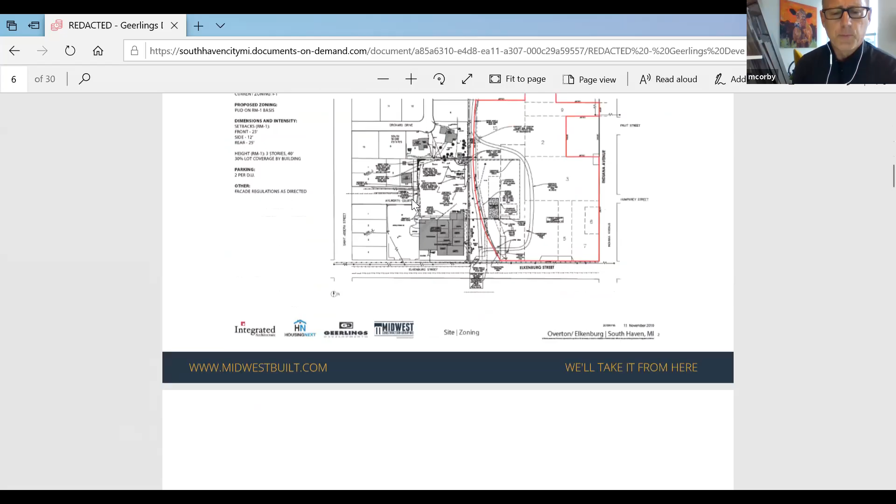And I think Ryan made a good point. Even since we made the submission in response to the RFQ, we've already talked about some alternative directions. So I think Ryan's point is well taken. What you're seeing is a good reference point, and it certainly helps explain a lot of the things we want to accomplish here, but we've also talked about some other things that I'll mention in a bit.

Right now, this current site plan includes 137 units with a focus on walkability. You can see a lot of emphasis on edges and how we use architecture to frame the edges, but also to contextually relate to things already in place, like the trail to the west of the property, and making sure we establish good edges both on Elkenburg and Indiana. Because the property is large enough, we wanted to make sure the internal circulation felt like it was part of the neighborhood, versus just arriving into a parking lot.

We want the entranceway to be tree-lined, walkable pathways, with front doors on those lanes. So I think it's very important that part of the current fabric of that area of the city be expanded.

We have a kind of community within a community, or a neighborhood for what it's worth. We've got a community center, but the idea was to create something unique here with the trail on the west edge.

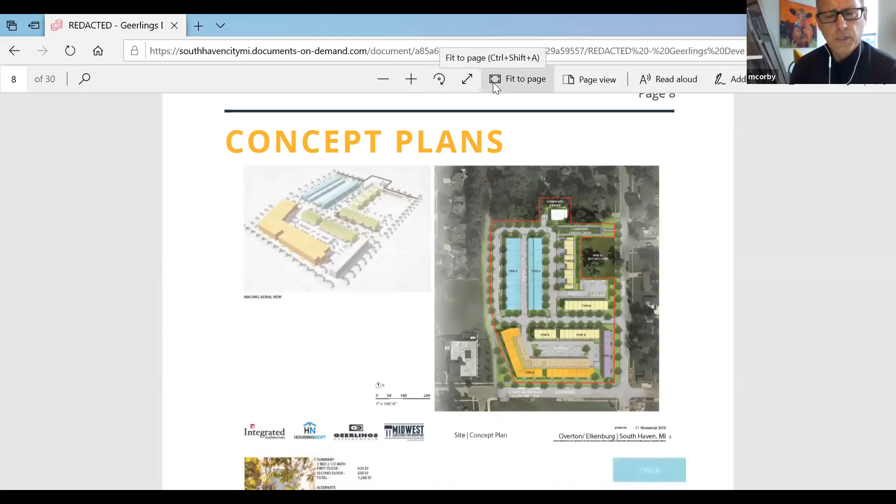We do have some community gardens that we're planning. The wonderful thing about this particular site is it's got a lot of amenities within the area, both recreational and so forth, but these pathways, like the trail and everything, are great. We were looking at bringing some community gardens in there to give another amenity and component to this particular area.

The community center would be a social hub of this neighborhood. We're also talking about introducing some units there too, so maybe a two-story building with some apartments above the community center itself. So it's really focused—our focus has been on walkability, diversity of unit types, and affordability in terms of having different scales of housing options for individuals and families to look at.

It's really something we're excited about. We feel it knits into the neighborhood very well. I guess I'll stop at that and let Scott continue with maybe some of his points.

Sure, if you have any questions, I don't know if we're holding questions to the end or not, but I'll be happy to take any now, or I'll let Scott continue. I don't know what the format is exactly either. So Kate, feel free to interrupt if anyone would like to make a comment, and we're certainly willing to talk at the end or during this time, whatever works best for you all.

Just to add a little bit to what Mike said, I know diversity of housing types is kind of a goal of the city. We're trying to be real sensitive to that. I also know home ownership is important, as we've done a couple projects in the Holland area with the same goals in mind.

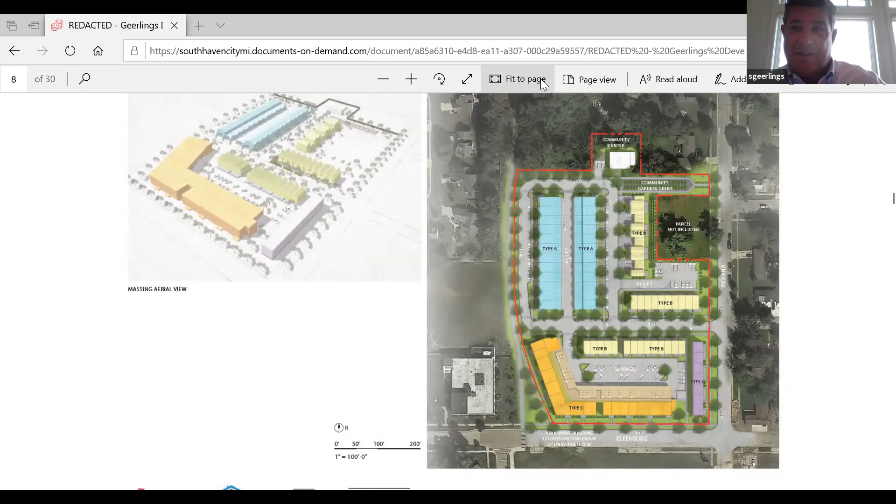I think at this point, I'll stop the share and see if anyone has their hand up, or if any of the Overton committee have any questions for Mike Corby. It looks like Mike Neese does. Let me see if I can get Mike to unmute. I think you did. Can you hear me? Yes, go ahead.

I was looking for just a little bit more information. I really appreciated the data you gave us on the price points, I thought that was well stated and really helped. But I wonder if you have any kind of a target on what that mix might be, a percentage or whatever of market price back to what we might call affordable. Have you thought through that yet in terms of what that target would have to look like to make this project possible for you?

You know, I would say, and Mike Corby, feel free to interject, I would say probably in the neighborhood of 50 to 60% affordable, and the balance market rate and/or for sale units. I think that's kind of where we're looking. Mike, what would your thoughts be on that? It might be actually just a little bit early to tell until we get the final definition of what we're actually building in place. But I think that's our thought. I think there's a need for both. And you know what, I think we'd like to work with you and that market study to kind of come up with what we all think is the sweet spot.

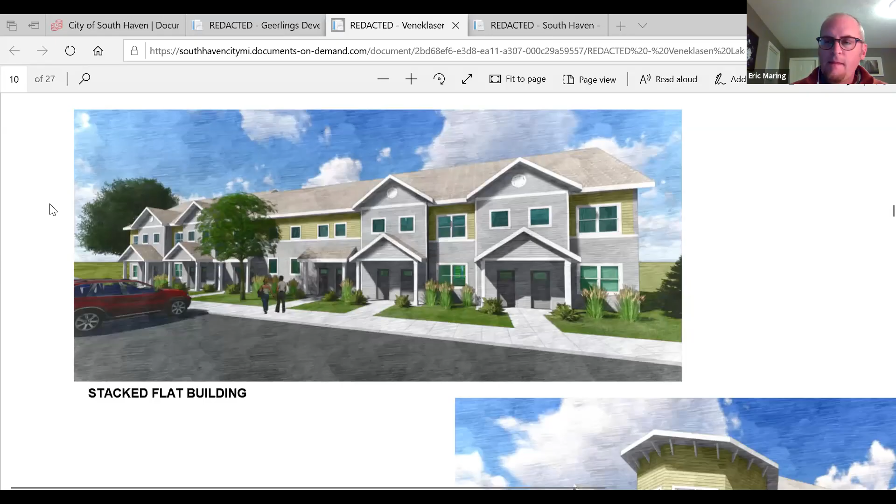Thanks, Phil. I don't know if you can bring up our drawings that we have. I think our site plan is on page 11. Let me see if I can fit it better. Zoom out a little bit. That's not going to work. All right, how's that? That should work.

Thank you. I'll just run through our initial thoughts. This is the result of our team's analysis and thoughts for the site. We're currently proposing 110 units on the site. We currently have a combination of apartments and stacked flats at this point. That's of course flexible as we move forward.

We have a 3-story building, similar to the last proposal, down at the southwest corner. Our thought being that of the whole site, that's probably the corner that feels like the most dense product would work. It could provide a little bit of a gateway feel between the Van Buren trail that runs through there.

We also have some 2-story stacked flat product around the rest of the site, really wanting to fit in better with the neighborhood here. That's why we went with the lower 2-story, smaller building. Most of these are, I think, around 8 or 12 units, so a little bit smaller scale.

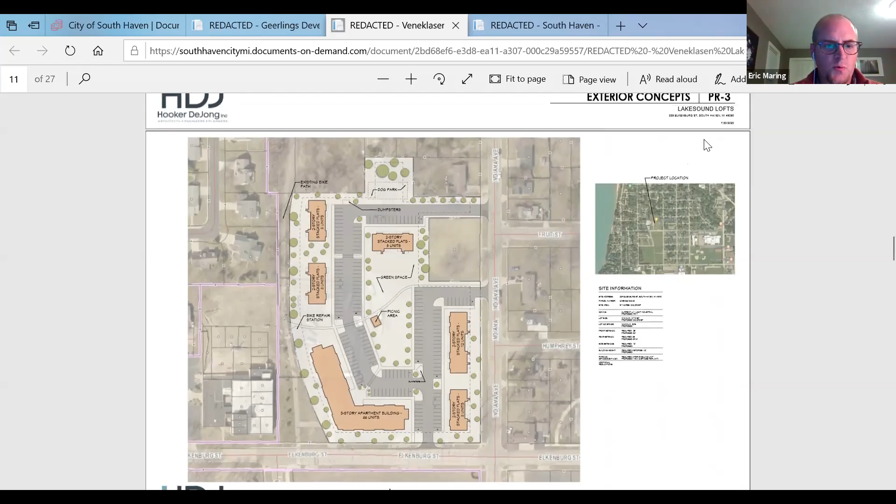Again, just to provide a better transition into the single family neighborhood to the northwest, the north, and the east there. The goal of the project was really trying to fit within the community with these 2-story buildings, and providing a stacked flat, which does provide good visibility both from the front of the unit and the back. So inside these units you have windows where we have parking, and windows again on the backyard, trying to provide some visibility into these landscape buffers or setbacks, as well as some visibility off of Indiana Avenue.

Along with the setbacks, we've started to include some central green space in here. You can see, with a path that runs through east-west, that provides a community connection through the site, to the Van Buren Trail, to the neighborhood to the east. We have a little central park planned here. We purposely don't have a playground, or we'll plan a smaller playground, building on what Chris said earlier about trying to utilize Elkenburg Park to the east, and helping to transform that area, knowing families in this development are going to use that park pretty heavily, so we can help further enhance that area as well.

We're proposing some project amenities in this 3-story apartment building that we have, figuring that's where we would locate some community spaces or lounge, fitness center, dog spot, bike storage, knowing we're along this nice path. These would be located on the ground floor of this apartment building, able to be accessed by all the residents of the property.

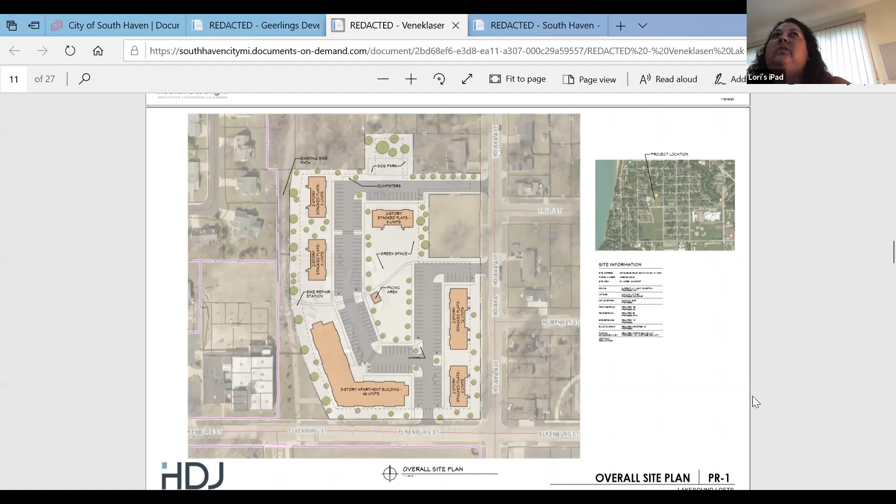We are rent regulated and governed overall by Section 42 of the Internal Revenue Code. That affordability has to be maintained for a minimum of 30 years, controlled via a recorded regulatory agreement. It also controls not just how much we can charge people, but how much we can renew them at, so we can't move them in at a low rate and then do a bait and switch a year down the road with a huge rent increase. We're restricted there as well. So the value of using these regulated lending sources is that it puts longer term restrictions in place and helps take care of that side of it.

So to us, one of the key points we took away from the city's RFQ was to ensure affordability as well as availability to workforce folks in the middle income range. Our feeling is that the best way to ensure that is to focus more on a rental project for the first project. Those regulatory restrictions from the finance sources are going to help ensure that affordability for the local workforce is maintained.

So as soon as product becomes available for home ownership, we don't have control anymore of who's moving into those homes. So I think it would put the issue of your concerns with vacation home purchases right back on the table. Our thought is to make this more of a two-phase project process, so that phase 1 is more of the rental rate units.

Phase 2 could become more of home ownership based units, so that the rental units become a stepping stone to home ownership. It's also understood that there may be a nearby parcel that may be developed with more of a home ownership focus.

So if that doesn't come to fruition, we could certainly adjust our site plan to include some home ownership options on one end of the parcel, while those households would still have access to the apartment amenities. But if that project does come to fruition, that may bring enough mix of home ownership into the area that maybe we do want to retain this one as more of an affordable rental type focus.

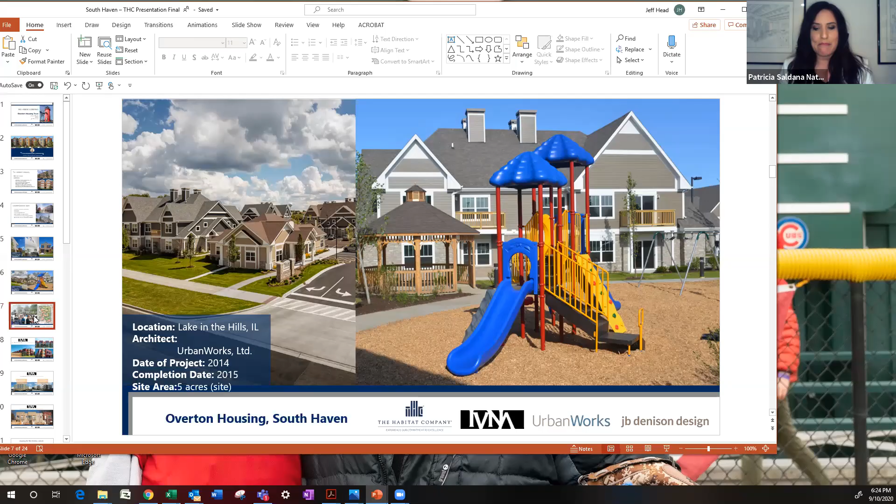We are also technical advisors for the Enterprise Green Communities. We're very focused on sustainability.

This project is one we're super excited about in Grand Rapids, a 9-acre site where we did community engagement with IVNA, Isaac, who's on the team also. We had a fabulous time getting to meet all of the residents. We treat everyone equally, and we love to hear the commentary.

This one is going to be a national green building standards project, also for sustainability. So we've done work in Illinois, Indiana, Virginia, and North Carolina.

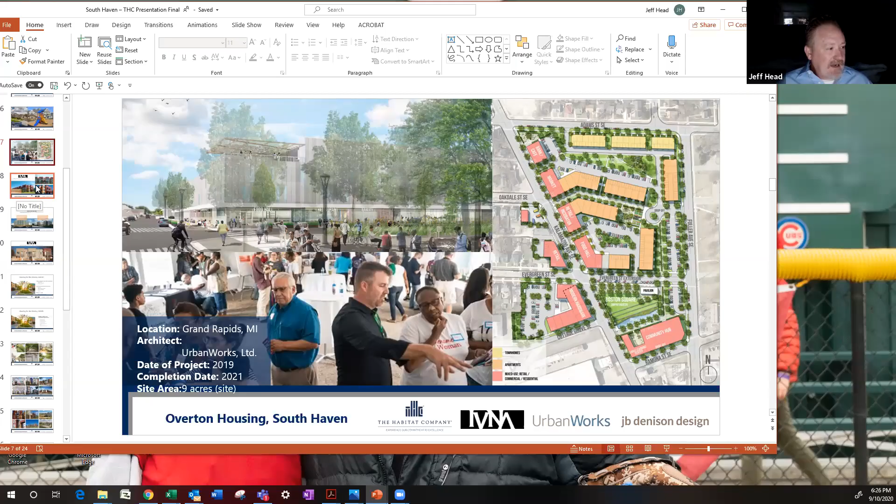So we've been working with IVNA, with Isaac, on the Grand Rapids project. It's been a great collaboration. As you know, people need to like to work with each other, and we've had a great time. Not only is he talented, but he also has done a lot of work in Michigan that we appreciated. So Isaac, if you could take it from here.

Thank you, Pat. Yes, my name is Isaac Norris, and I am an architect from Grand Rapids, Michigan. I've run a small architectural firm in the central city core of Grand Rapids for 25 years.

Over the past 10 years, we've been blessed with the opportunity to complete quite a few housing projects, LIHTC projects, neighborhood NSP projects, and some MSHDA projects. What you're looking at here is a LEED certified project that we just completed, 36 units of housing for a group called Link.

They're a developer here in Grand Rapids. We've had a very extensive relationship with them over the past probably 10 years, and we've completed over 200 units of housing with them. This is just completed, called Garfield Loft Apartments, with 2 and 3 bedroom units.

Across the street is what I kind of call the sister project to Garfield Lofts, on the left-hand side — that's 26 units of LIHTC housing. It's under construction right now, and it's probably about 80–85% complete.

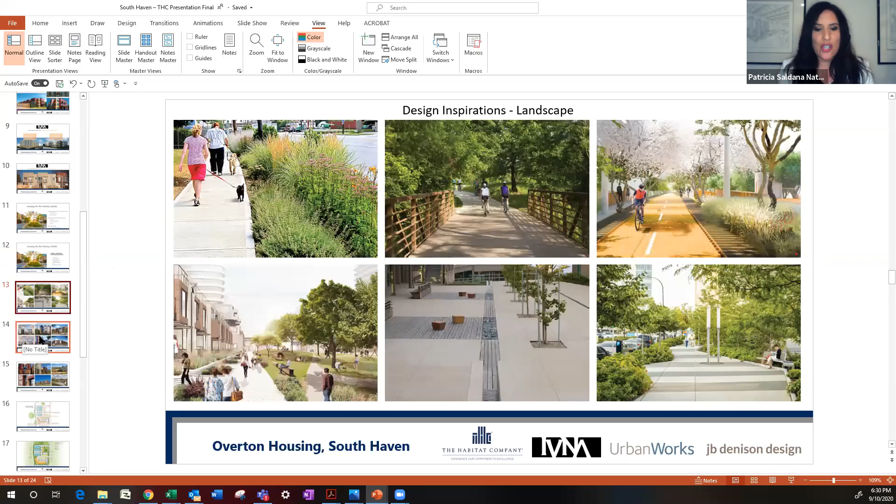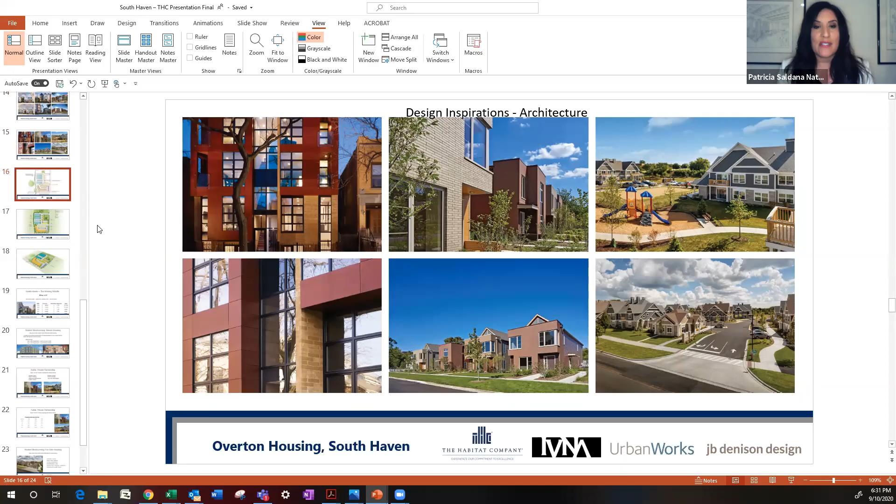That landscape shown is ideas and inspiration of what we can do to the Van Buren Trail. Here are some ideas of townhomes and stacked flats, the kind of projects that we can do. Here again are some of our own projects, some of which I've shown previously. On our team is also JB Denison Design. They are fabulous interior designers, and that's important for projects to make sure that everything is picked properly. We did a quick study, and I know we're short on time, but that shows our study of how

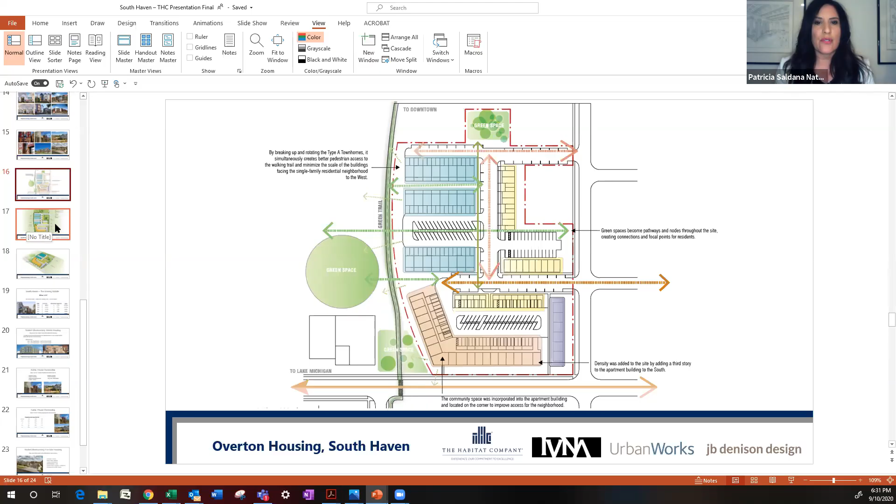we connect the neighborhood to the green space, how we make sure there is enough walkability, to make sure there is outdoor green space and a play lot. Our parking, as was asked previously, it's 1.4 spots for a 1 bedroom and 2 spaces for the 2 to 3 bedroom. That connectivity of the north and south lots is extremely important, and always putting density where

there is other density. The Factory Lofts is an amazing project. Here is our concept where we connect. What is shown there is the Type A units that go east-west, connecting that to the trail, doing some of the stacked flats, which are the yellow, the Type B units. Some below on the Type C, which are the apartments, and of course the L-shaped building, which has the community room, community space right at the corner, so that could really be engaging the entire neighborhood.

We see this as really being a project that is going to enhance the entire neighborhood. Next, there is a diagram, which is an axonometric. This is only massing, but just to give you an idea of the kind of project it could be. We have on our staff an associate principal who is a certified planner, and that helps make sure all the planning is done properly. And, as Jeff mentioned, we're proud of the fact that we have almost 40 design awards that we have won for our work. Thanks. Thanks, Pat.

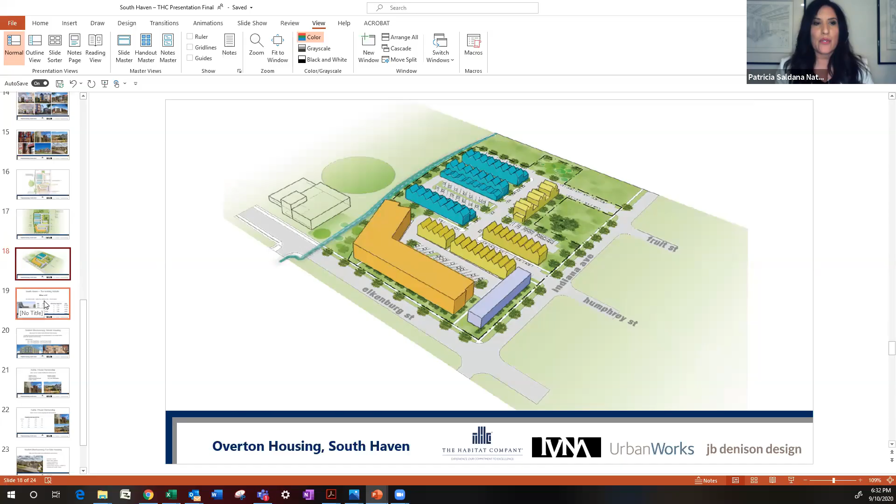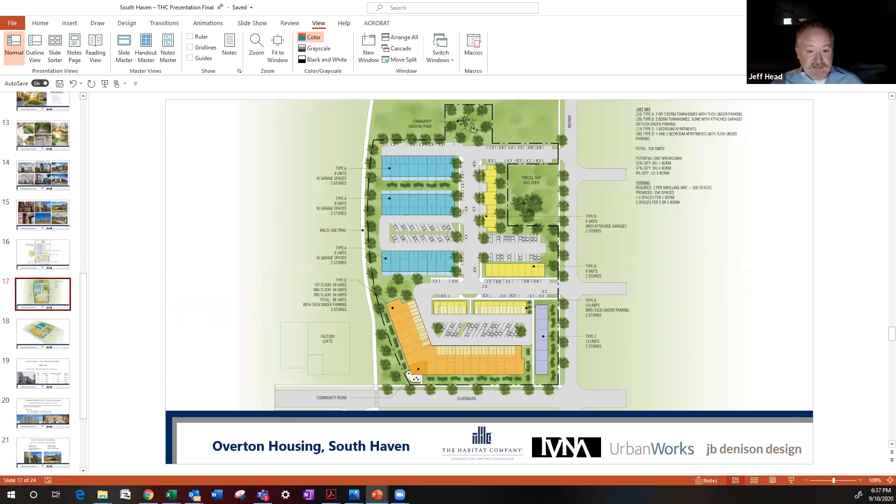I think the previous developer had a good point, and Ryan said this as well, that the solution is for the neighborhood. This site is a major component of the neighborhood, but focusing all of the for-sale energy on this site, as opposed to a site to the south, I think it needs to be a comprehensive look. So where I would leave it is with that, to take some questions and hear your thoughts on the presentation that we've made.

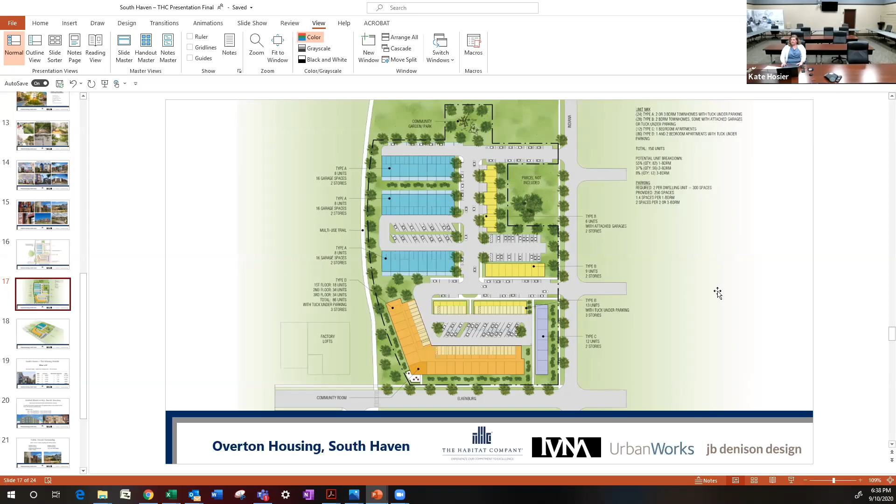All right, we can do that. Thank you. If you want to stop sharing your screen, I'll go back here and see if we have any... let me see. There we go. It looks like Steve's got his hand up. Steve, I'll take your question first.

I'm going to stick to my game plan. I think Patricia kind of answered some of this during her presentation, but maybe elaborate on what processes you use to resolve conflicts within the surrounding neighborhood, and how do you try and resolve those conflicts? Right, well, absolutely, absolutely. Go ahead.

Oh sorry, Jeff, if you want to go. No, I was going to really just piggyback on what Pat said - the plan is that we sit down up front and hear what people have to say about their goals, and I think Pat is really a great facilitator at taking people's ideas in somewhat of the abstract and bringing them into a visual context that helps people clarify what they mean and what the different goals and objectives mean in terms of a built environment.

And maybe you could say a little more about that, Pat, while I turn on a light since it's gotten dark during the conversation. Yeah, you're in the dark there.

So yeah, the goal really with all projects is to be honest and transparent - it's for everyone to win-win. We've had community meetings, we've had preference studies. We've even done things for some universities where there are many different student groups, so all kinds of things. Now that it's COVID, what we've transferred to is everything virtual, where there can be voting online. The city of South Haven can keep updates of the progress of the design so that everything is as transparent as possible.